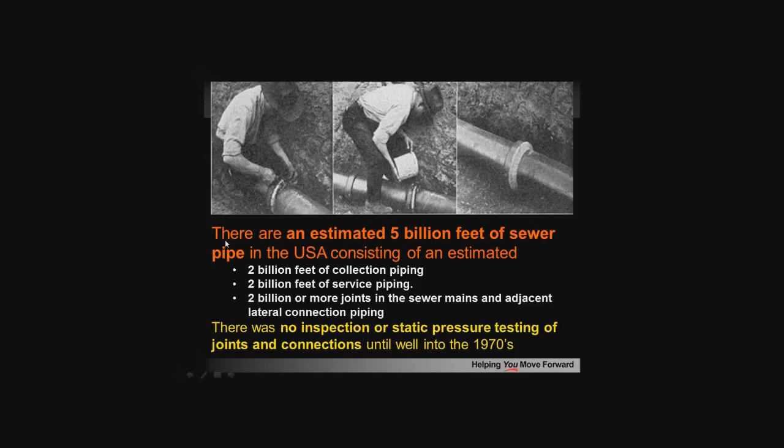The trench is basically what we see here with the bedding. This is only one trench. There's multiple trenches underground, and all these eventually meet somewhere, making it easier for any groundwater to travel within a man-made trench than the native soil.

Once again, technologies for sealing the joints as applied here could have been cement or tar. These trenches make it easier, once again, for any water coming either sideways, along it, or above it to follow these channels along our piping system.

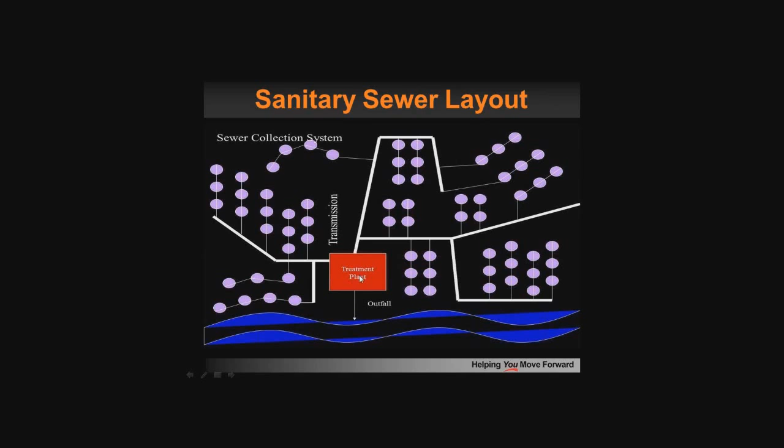Here's a little overview of our collection system. We have our manholes, our piping, our transmission lines, everything's for pump stations. They're being pumped to the treatment plant, treated, and back to the outfall.

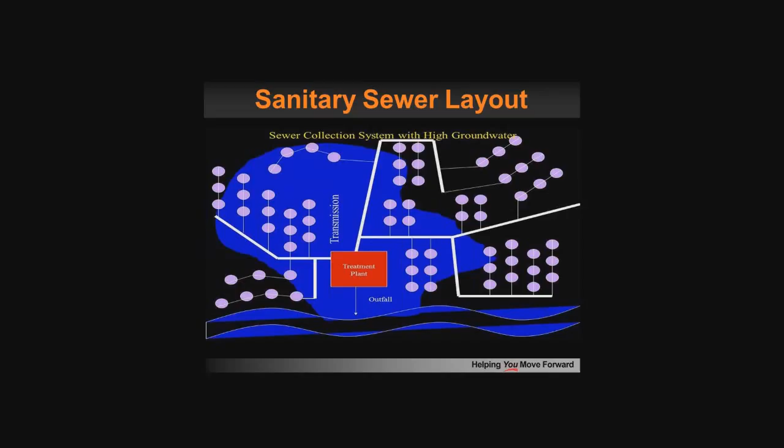Some of our systems are underwater. When I say underwater, I mean we have groundwater that's present on the low end of the system. If groundwater is there and it penetrates into the system, it can surcharge our system, creating all the negative effects of SSOs, or flowing back into the homes, basement floodings, etc. So we don't want that.

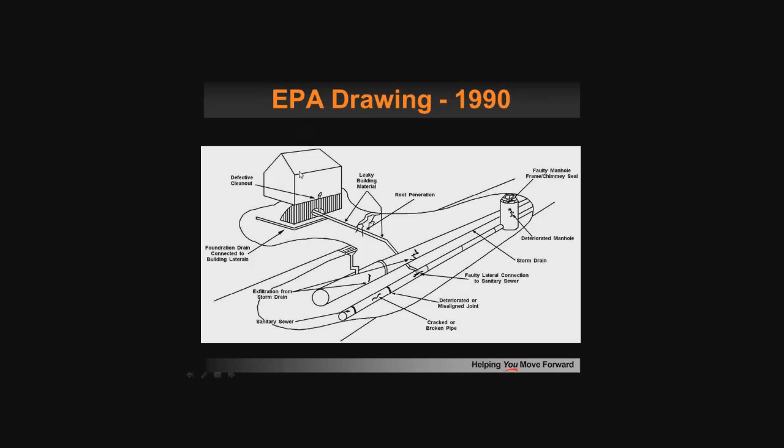Here's a famous EPA drawing from 1990. We've basically made it a little more visible for us to understand what's going on. So here's our storm trench, here's our sewer trench, and usually the storm trench is at a higher elevation in the ground than the sanitary.

We have our manholes that basically allow some water to come in. We have storm sewers that are not always airtight or watertight. Even when they're put in, there's more standard practices now requiring these to be air tested or even visually inspected for non-leaking after they've been installed.

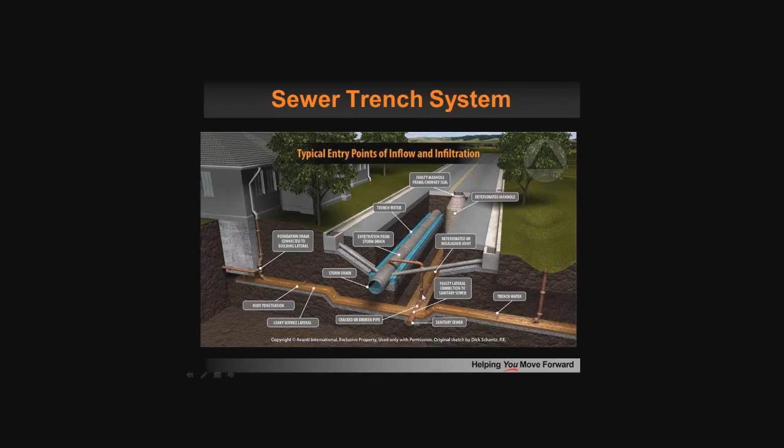We have our foundation drains here. We have inflow that may be coming in, maybe a sump pump. We've got problems with the sewers with root penetration, cracked or broken pipes, defective service connections, name it. All these are buried infrastructure, and at some point where there are joints, they will allow groundwater to come in.

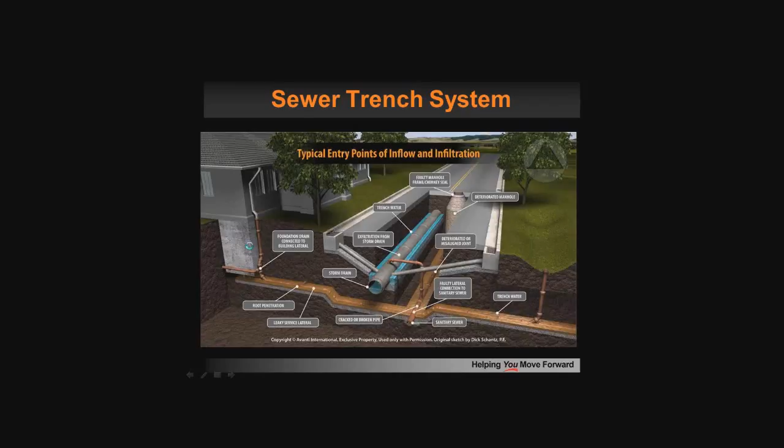Here's another side view. Basically, if we have a rain event, water will go along the trench of the storm sewer, eventually finding its way into the sanitary, overloading the system and creating issues. Issues we know of above ground, or when we see manhole covers where we have water coming out, not always a nice view.

Another picture of this: our catch basins, storm sewers. We have grates, everything's going towards the storm sewer, trying to get the water away from the house or homes into our piping systems. Our foundation drains, storm drains, sanitary sewers, all well embedded in man-made trenches.

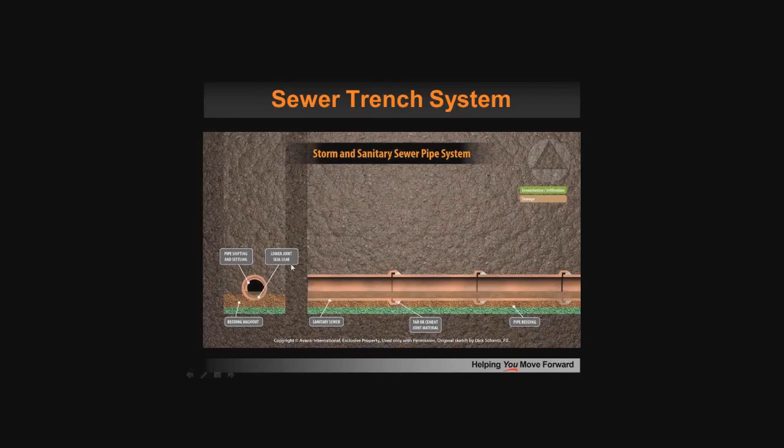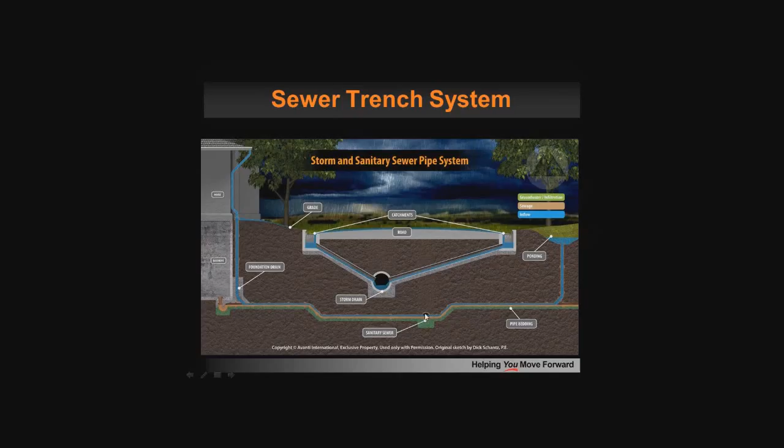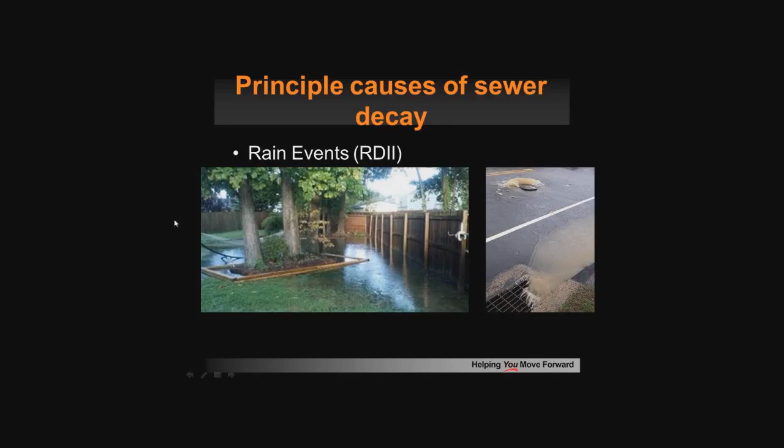Here's what looks above ground. How many times have we seen this? Here's a backyard, here's our storm sewer gulping everything down from the street, asphalt. Our sanitary sewers are overflowing. I'm not saying one leads to the other, but we can visually see consequences above ground and just imagine what's going on underground.

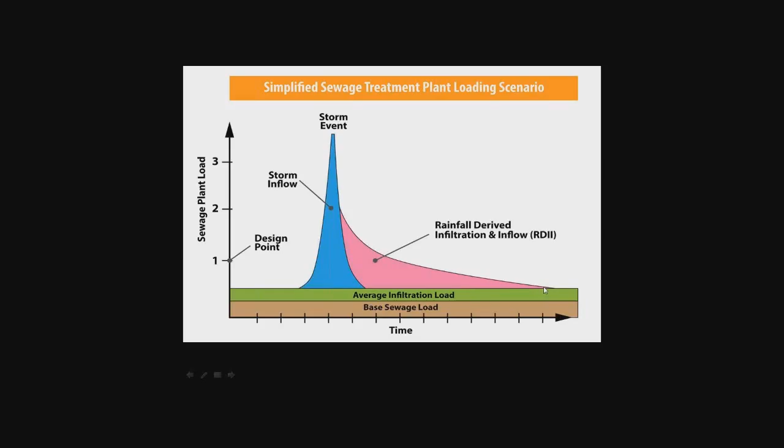Here's our famous graph. We have this storm event, the inflow along with groundwater. This is where we get to our peak, where groundwater eventually percolates into the ground. This is where we have a smoother line here, that rainfall or groundwater saturated soil finds its way into our collection system, and eventually the flows go back down to what they were before the rain event.

So we surcharge our systems after rain events when we have infiltration coming into these pipes. You see here exfiltration. Why is there exfiltration here? Well, all this storm sewer into the trench will find its way into the sanitary trench, overload it. Then we get exfiltration where we have sewer water going out into the soil.

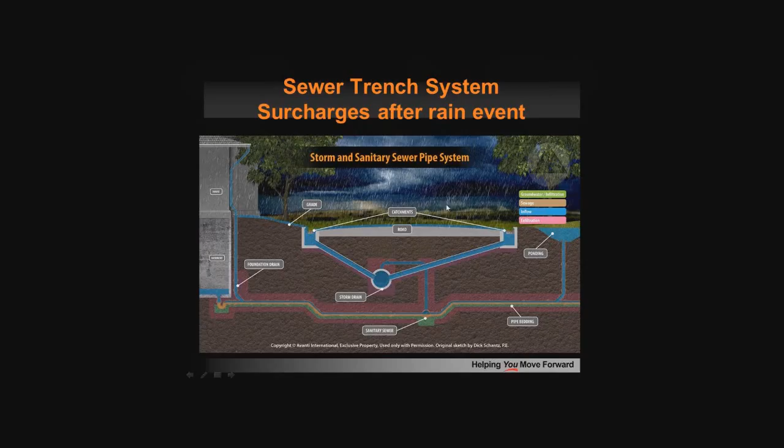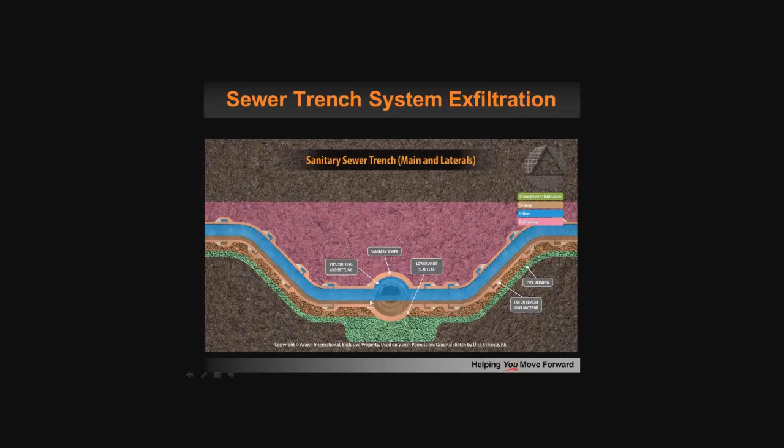As that rain event eventually stops, you may get infiltration. What we're seeing here is still the exfiltration, where our sewer system is overloaded. But as time goes by, what happens? Well, now we have infiltration. What this is, movement of water coming into the system, coming out due to our bedding.

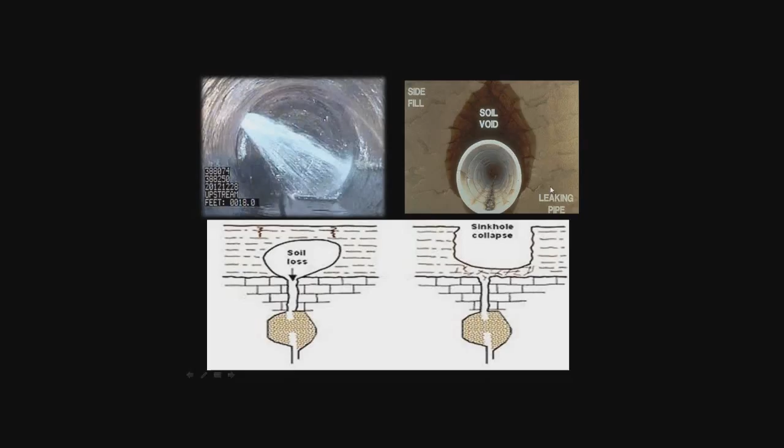We may have fines that also come in. We're washing out around the joints, around the connections, creating areas of no more backfill or very loose backfill. So now that our system is going back down normally, that groundwater that's saturated the soil is now coming in. Originally we had an overload going out. Now we have groundwater coming in, and that's on a long curve that we saw after that high rain event.

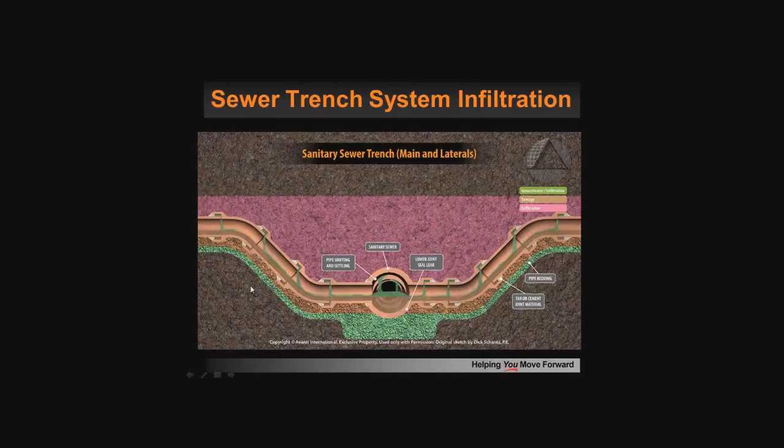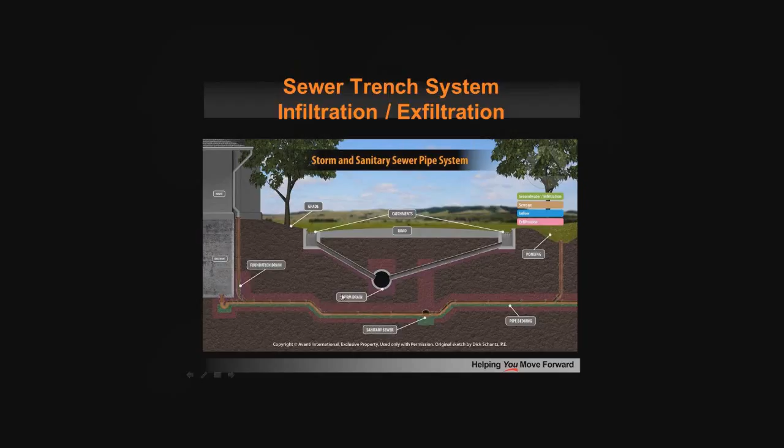So this is going on, saturated soils, our catchments, everything here. We have our exfiltration, infiltration, movement of water in and out of the joints, eventually this is what we're seeing, the cutout. What used to be supported may not be supported as well anymore, as the fines may have washed into our sewer system. If you're down in Florida, sometimes you'll see there's as much sand coming in as water. Same thing can happen.

And if left unattended, all these millions of dollars that we've put into the ground without maintaining or trying to sustain these systems, we can get failures in the long run. Failures may be due to not preventing that water from coming in. I can talk to you about failures here - I've personally witnessed this. But it's our responsibility to maintain and sustain these investments.

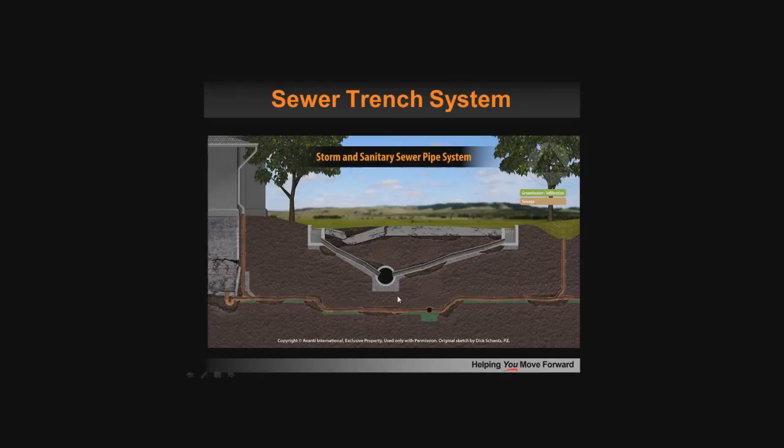A few examples of what we can see. Here's a manhole allowing groundwater to come in. This is probably extreme, but it is out there. All you've got to do is, excuse the expression, pop up a few manhole covers and have a look after a rain event.

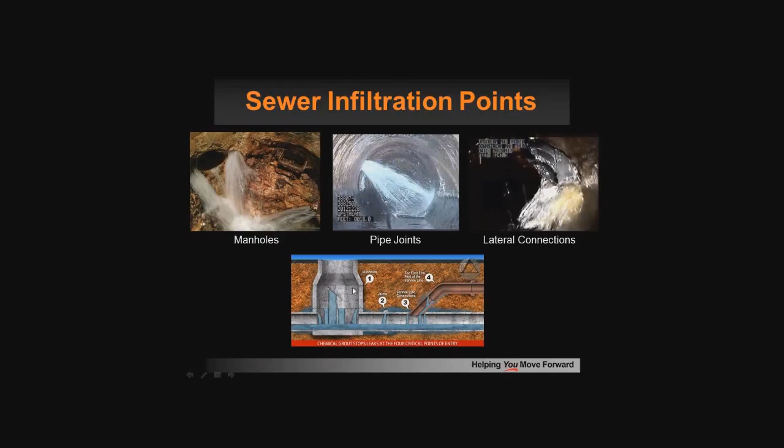Infiltration at the joint, same thing, and at service connections. So all the points of entry into our collection systems that we can come out and fix using chemical grouts when it's not structural issues.

This is a very nice drawing. This is our piping system, no problems. We have a joint that allows groundwater to come in, or groundwater or sewage water to go out when we're in surcharge. And basically all of the fines come in, around or adjacent to the joint.

Right now we're getting into a structural problem at stage 3. Well, chemical grouts are not structural. They are designed to go out into the soil and seal the soil adjacent to these. So it can be used at stage 1 or stage 2.

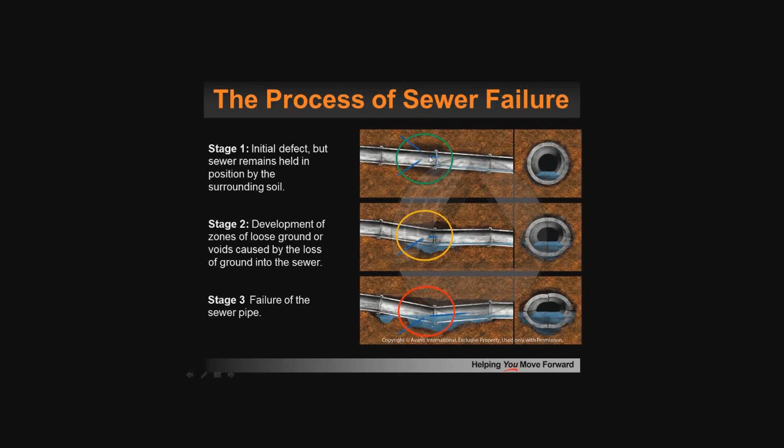Multiple technologies out there: dig and replace, fold and form, sectional lining, pipe bursting, cured in place, and chemical grouting. You've got structural repairs here, and you have chemical grouting, which is the only technology that's designed to stop groundwater from the inside and sealing the soil around the issues. So how can you get the most return on your investment?

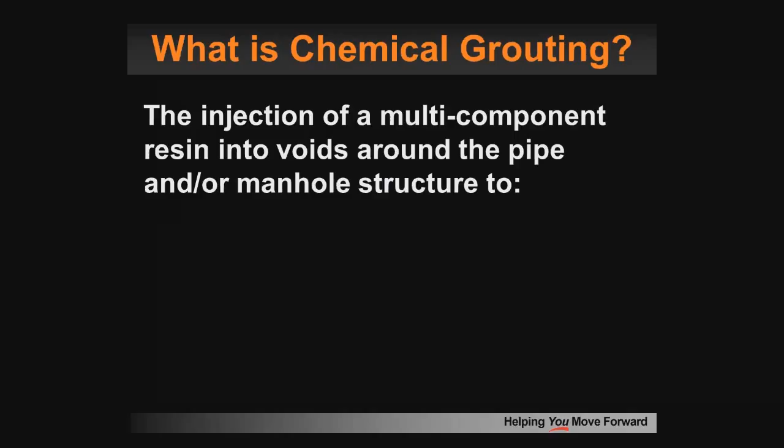First, let's define what is a chemical grout. It's the injection of a multi-component resin into voids around the pipe and or structure. It doesn't matter what the structure is - it could be a wet well, a lift station, or a manhole. But the goal is to stop infiltration, exfiltration, stabilize the surrounding soil, stabilize the pipe, and seal the annulus between the host pipe and the liner.

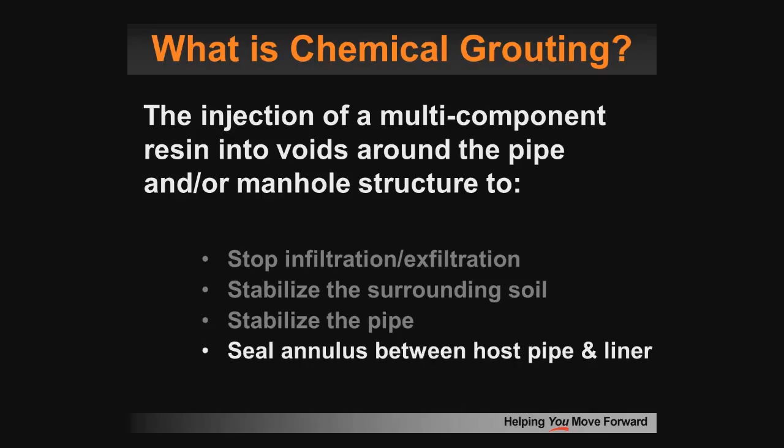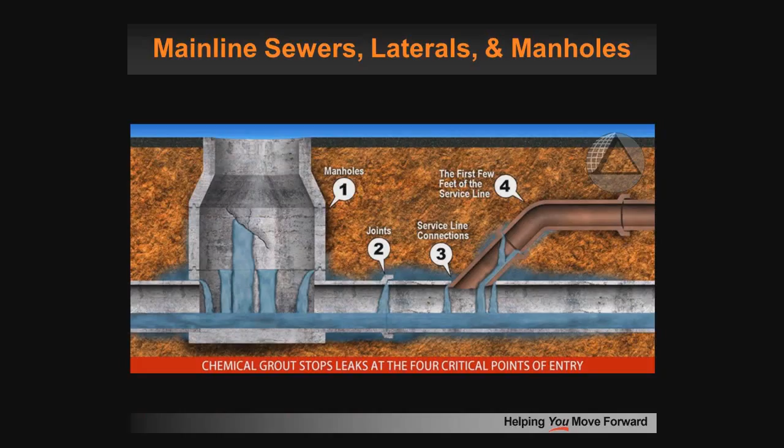They started using chemical grouts in municipal applications in the 1960s, so we consider it a permanent solution.

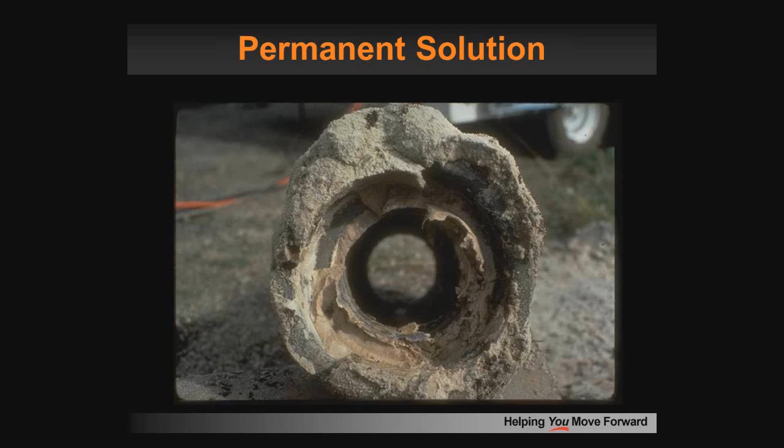This is what they call the grout donut. This was from an 8-inch pipe they dug up some 25 years after it had been grouted. And this donut is what stops the exfiltration and the infiltration.

We consider it permanent because the U.S. Department of Energy did testing on 7 different types of grouts over a 20-year period, and they gave acrylamide a 362-year half-life in the soil. They ultimately used it to encapsulate radioactive waste, but they really wanted a long-term solution to stop the groundwater from leaching that waste into local streams.

There was a question that was sent in prior to the webinar from Mike Cardwell in Westland, Oregon. Mike, thanks for the question. It addressed wet-dry cycling and also infiltration at laterals.

Regarding wet-dry cycling, it can go through wet-dry cycles. If you have a cup of cured grout on your desk, it will start to shrink, and when you add water to it, it'll come back out. It'll do that over and over again. If you allowed it to totally dry out, then it wouldn't come back, but as long as there's some humidity or some moisture in the soil, it'll keep the grout happy.

And there is groundwater outside the pipe - that's why you're grouting in the first place - and then there's sewage inside the pipe. So between both of those, they'll keep the grout happy.

We sell the same product that's used in municipal markets here. We sell into Egypt, where it's a very arid climate, arid soils, and there's enough moisture in the soil to keep the grout from shrinking and shriveling up. And there they're using it to stop water coming into large tunnels.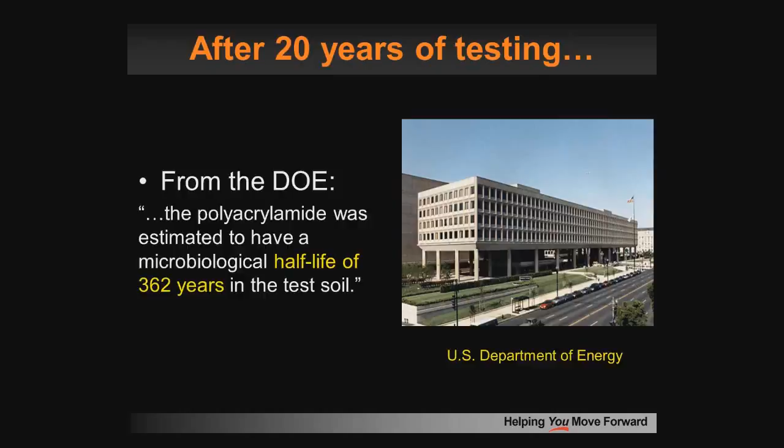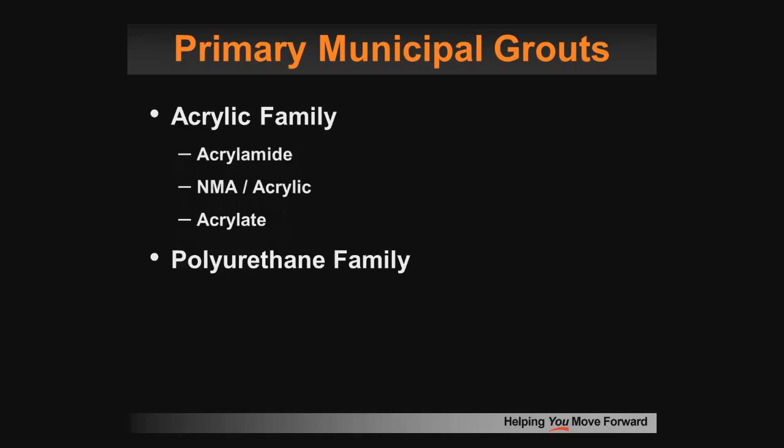Primary municipal grouts include acrylics and polyurethanes, and the acrylic family breaks down into acrylamide grout, NMA or acrylic, and acrylate grouts. The main difference between those is the amount of acrylamide in each one.

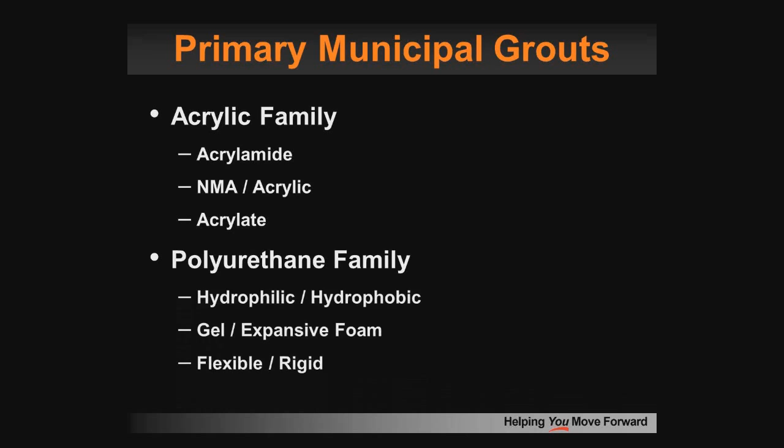The urethane family breaks into hydrophilics or hydrophobics, which really addresses whether or not it can go through wet-dry cycles. It can be a gel or an expansive foam, and it can cure flexibly or rigidly.

The reason acrylics are primarily used in municipal grouting is they're the thinnest products on the market. If you have a cup of acrylamide grout sitting next to a cup of water, you cannot tell the difference. Water is 1 centipoise, acrylamide grout is about 1.2 or 1.5 - you really can't tell. There's no suspended solid, so whereas cement can only go as far into the soil as the particle size will allow it, there are no suspended particles in acrylic grout, so they can go anywhere water goes.

Field adjustable cure times - the contractor or the municipality can change the cure time anywhere from 5 seconds up to 14 hours in the field. They can adjust the gel strength when they have high levels of infiltration. They can use soap and water for cleanup. The grouts are not activated by moisture - that's helpful. There's no need for solvents, and there's a successful track record.

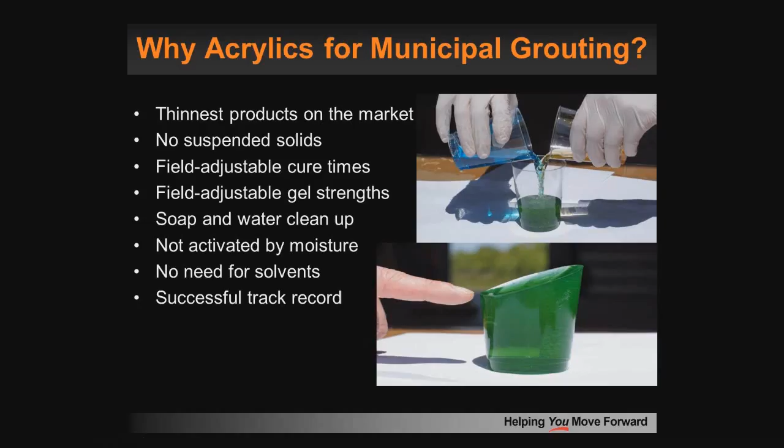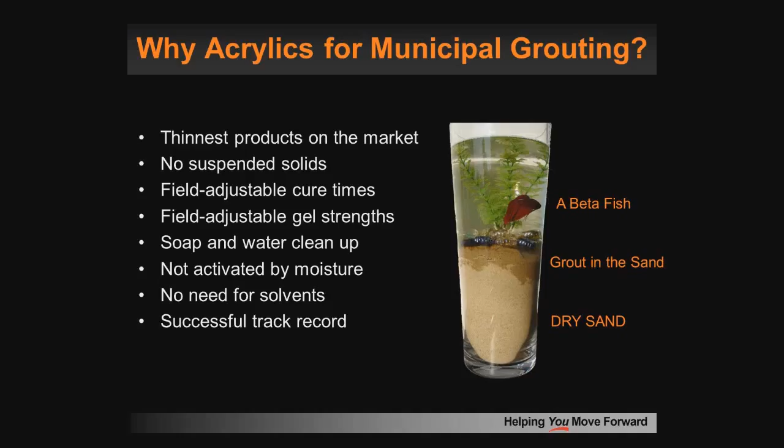For example, caffeine and aspirin are more toxic than the acrylamide in chemical grout. So all that is to say it's less toxic than things we use every day. It's important to keep it in context. And with that, I'll pass it on to Ron.

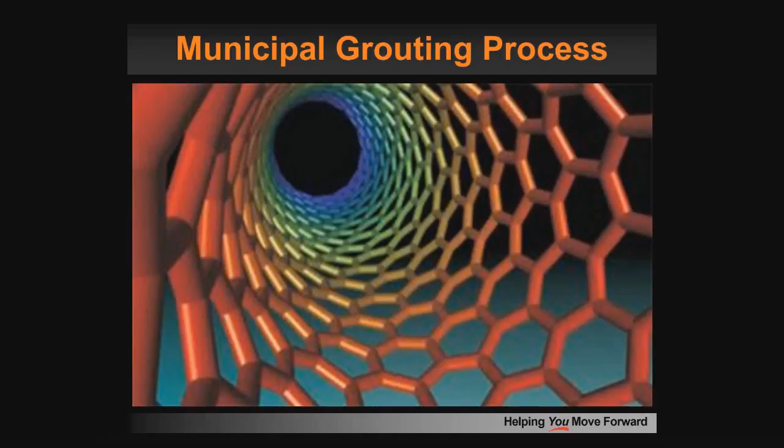Well, I would also like to thank everybody for attending this grout webinar. I'm going to discuss the processes about grout, and these processes, when done correctly, will yield predictable outcomes.

These processes include cleaning, inspection, assessment, prioritization, and rehabilitation of the systems. With sewer cleaning, basically a vacuum truck positions itself over a manhole and with a jet nozzle moves the debris and fine sands to the manhole, where the materials are vacuumed out of the system.

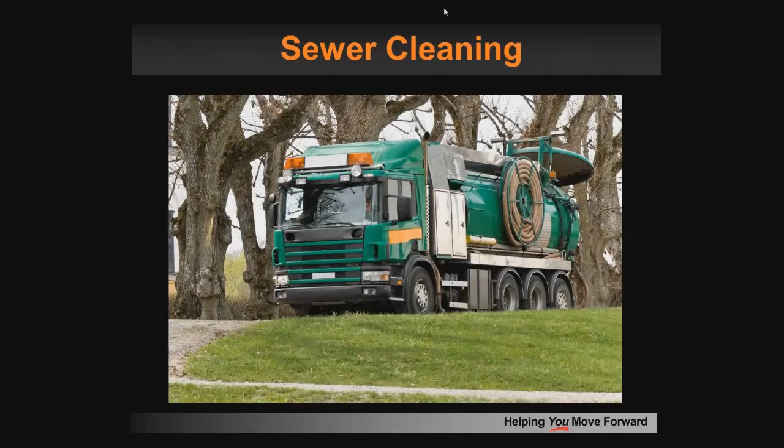Now, the inspection process uses a CCTV camera mounted on a robotic crawler, controlled remotely by an operator. The crawler travels through the pipeline, and the operator documents the observations or defect codes according to the PACP codes. In the assessment process, the coded observations or defects help determine if the line segment has infiltration or structural issues.

The collected data will be used to set priorities within the collection system for rehabilitation.

If it's a structural repair requiring pipe replacement, pipe bursting, or even a lining project may be needed for the rehab work. In a non-structural repair, chemical grout is a process by which a joint or connection is tested and sealed by a packer.

That pressure injects chemical grout through a pathway into the surrounding soil, and an air test is performed to validate the repair. Now, in the grouting process, it involves three steps: test, seal, and validate.

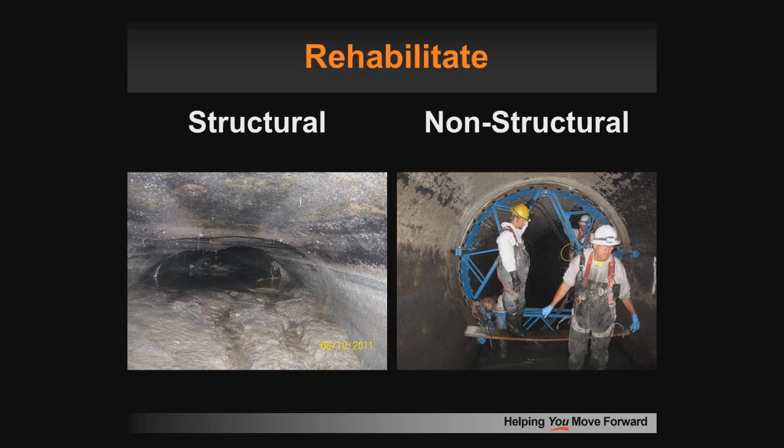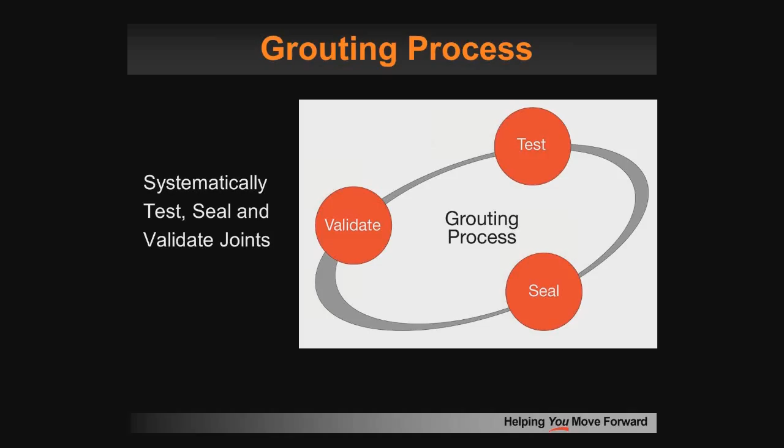In the testing portion, the operator will pull a packer and a camera through the line segment, pressure testing every joint. A pressure transducer mounted to the packer can measure the void pressures and electrically transmit the reading back to a digital readout on the control panel, where the operator can see that the joint passes or fails an air test.

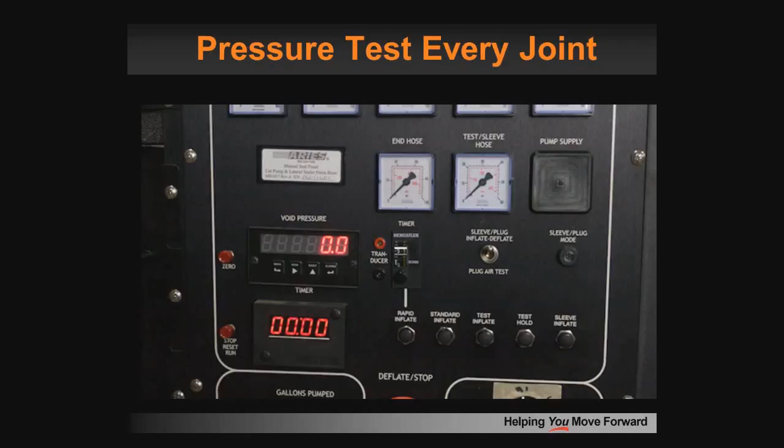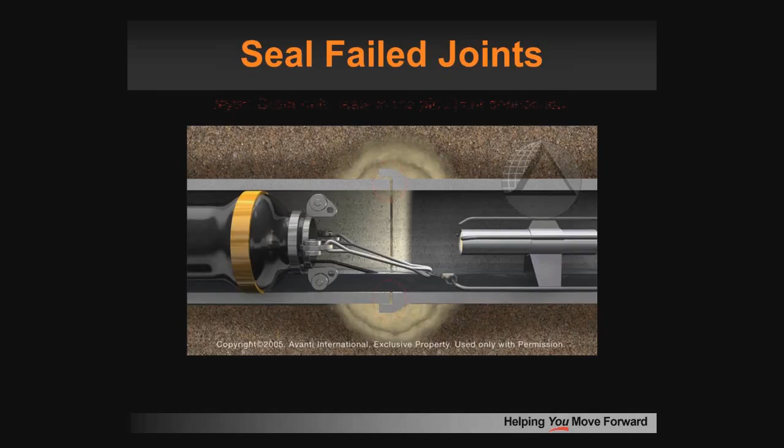In the sealing process, all of the failing joints are pressure injected with chemical grout to refusal. We use the pathway in the failed joint to inject chemical grout into the soil, whereby we make a soil-grout substrate that will stop infiltration of groundwater.

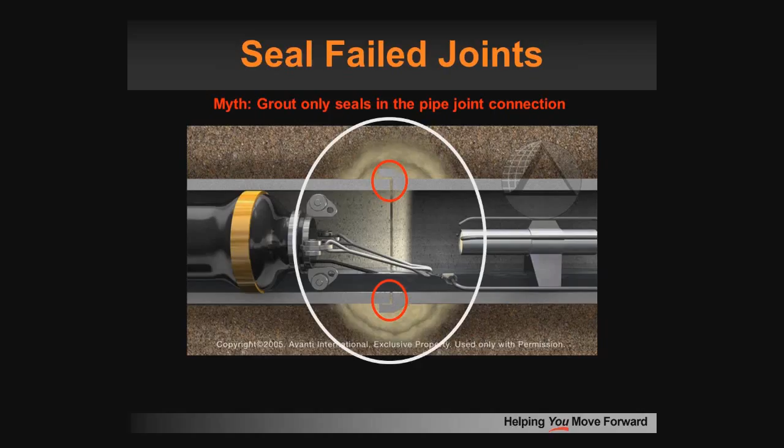We then validate that the joint repair was done by conducting a retest of the chemically sealed joint with another air test, and confirm that the joint passes the test. These three steps ensure that a grouting project is done properly and according to the ASTM specifications.

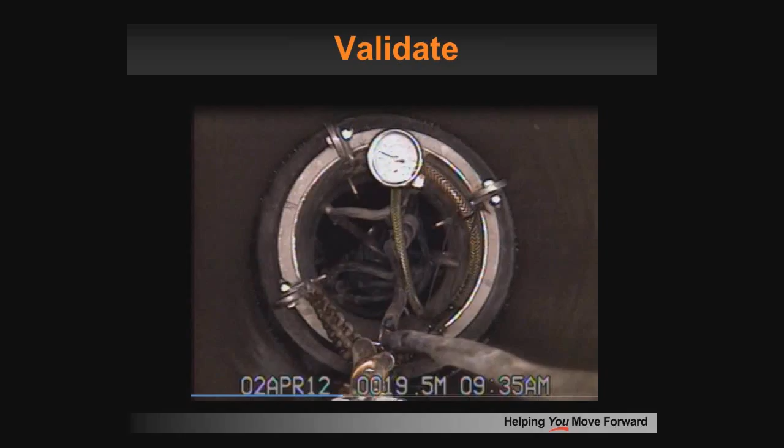Record keeping: this information is necessary for us to record for future review and to evaluate that the grouting processes were followed. Here we have two documents, the grout mix data sheet and the sewer test seal work data sheet.

On the first document, the data collected includes information on the contract, the municipality, and the work to be performed. It also includes information on the sewer pipe, like pipe diameter, materials, and the lateral pipe information.

Here we have the test and seal packer information. Information is collected on the type of packer being used, mainline or lateral, and the size of the packer and the void volume, the effective sealing length of the lateral bladder.

A little further down is the grout sealing chemical mix. There is information on tank size, the batch size that is mixed, the percent solids, and the gel time of the mix. This information is necessary to confirm that the chemicals were mixed according to the manufacturer specifications.

On the second page is a sewer test, seal, and data worksheet. The information collected here is for the specific line being worked on. It has all the information: who's performing the repair, the location of the basin, and the project taking place, basically the city and street name, upstream manhole and downstream numbers.

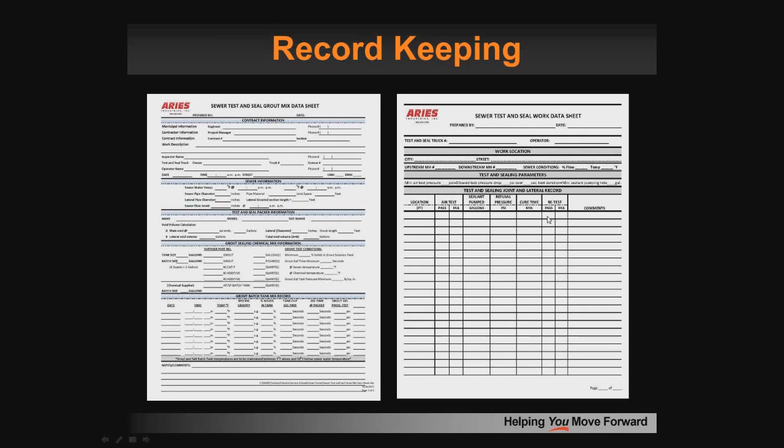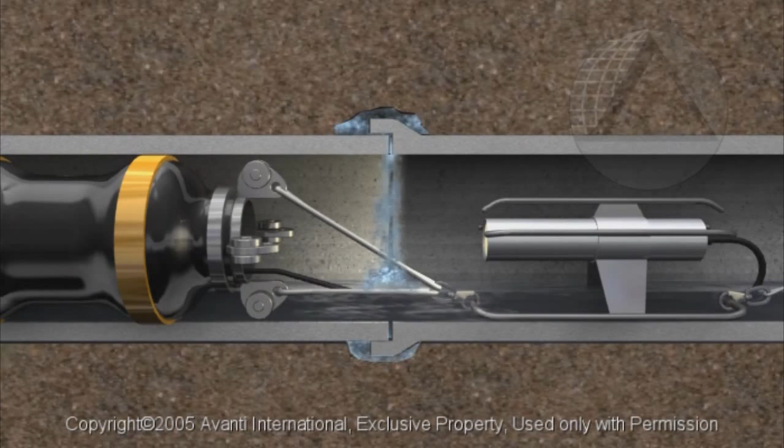On our first animation, here we see groundwater entering the sewer system through a joint. The camera and packer are positioned over the joint, and an air test is performed. Upon failure of the air test, chemical grout is injected under pressure through the pathway into the surrounding soil to stop the infiltration and to stabilize the area adjacent to the joint. A second air test is performed to confirm that the repair had been made, and then the process was repeated on the next joint.

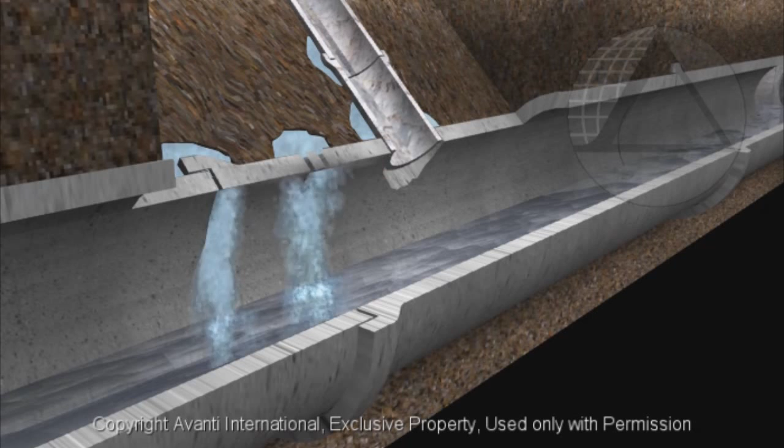On animation 2, here we see a main line with infiltration and a lateral connection. A liner is installed for a structural repair.

Hey Ron, now we have to reinstate. Can I ask you to hold for a second? Let the PowerPoint catch up to you real quick. Okay, where are we at on it? We're now doing the sealed lateral. Go ahead.

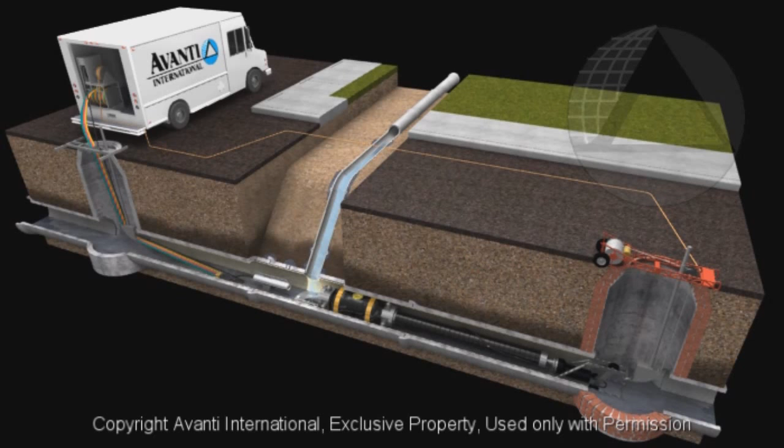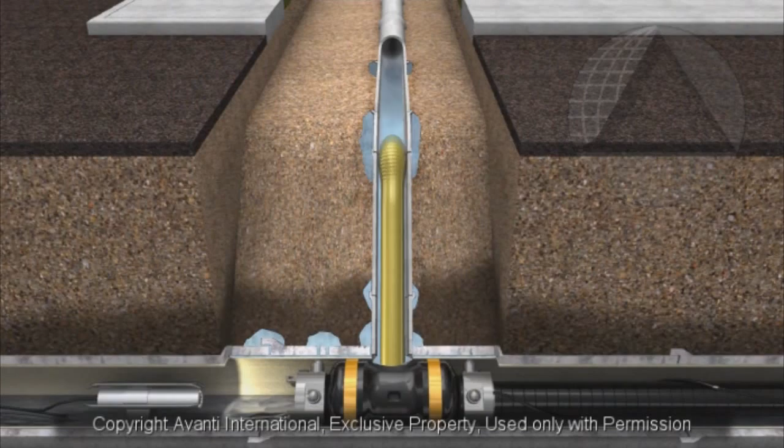We have the main line with infiltration and a lateral connection. A liner is installed for a structural repair, and then the packer is rotated into position. A lateral bladder is inflated, and an air test is performed. Once it has failed, chemical grout is injected up the lateral connection through the annulus and out the defects in the pipe. A second air test is performed to confirm that the process was done properly. The lateral bladder is vacuumed back into the packer, and then the operator will continue on to the next connection.

Yep, if you'll hold that there for a moment. I want to ask a question from the audience, and I think I'd like to direct this to Daniel, and I know you'll have a crisp answer for this, Daniel. Why not use urethanes in main lines and laterals, versus acrylamides, or the acrylics? Yeah, great question.

Urethanes are more often used in cracks as expansive foams or void fill, but in the main lines, urethanes are moisture activated. That means you run the higher risk of grouting up your hoses. Since acrylics are not moisture activated, urethanes could grout up your hoses. Also when they cure, they're very sticky, and they slowly get thicker and thicker, whereas acrylics stay water-like and then all of a sudden turn into a solid, so they can penetrate farther. It would also be much more expensive to grout main lines and laterals with urethanes - well, it might be somewhat more expensive, but I think it mainly comes down to the sticky.

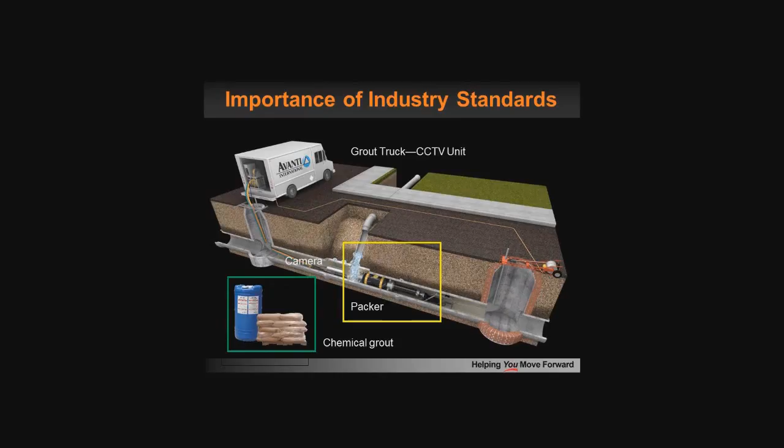Perfect, all right, well if you move to the next slide please. Yes, okay sir. The importance of industry standards. Well, there's multiple pieces of equipment and techniques here that come into one situation, basically to stop that groundwater from coming in. So there are test and seal packers. Mark, do me a favor and press that button to show my screen.

TV and grouting unit. The first thing we want to make sure is that the chemicals are going to perform as we want them to, as needed. So it's important to have chemicals that are not biodegradable, that will react in the presence of active running water, and that will perform in these cases. So there are standards on the chemicals being used.

On the delivery equipment, if we're looking at the CCTV grout truck, we have to make sure we can pump these chemicals out at a certain gallons per minute, depending on what we're doing. We need the monitoring system for the void pressure, whether it be air testing or chemical pumping in the void, to give us information in the truck. What are these pressures? How many gallons am I pumping out? All this, including compressors, must be unified to give you the performance that's required.

The same goes with the packers. You have mainline packers. The operators working with these packers need to know the voids between that packer and the wall. Why? Because that gives you information on how long it takes to fill the void, so you can work with your gel time and get the materials on the outside of the pipe in a reasonable amount of time. All these are very important.

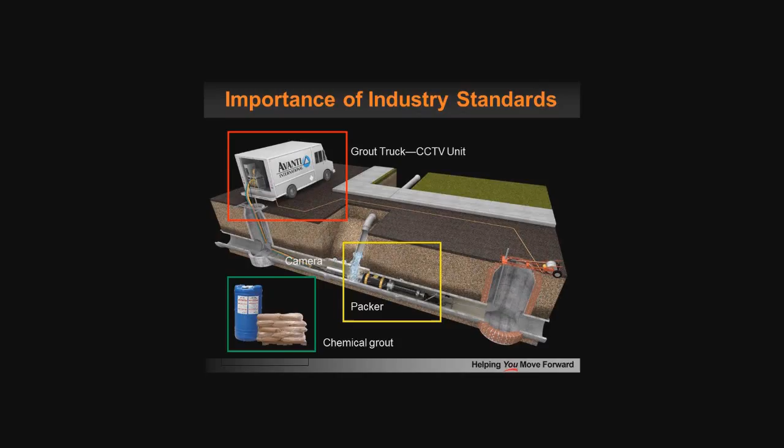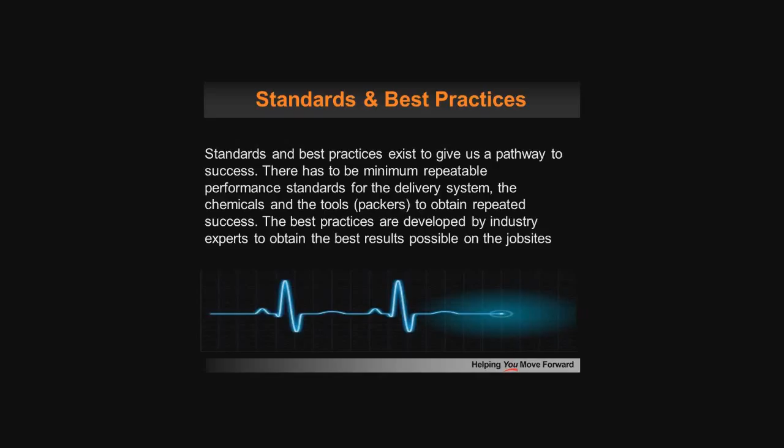So they must be unified. There are standards. Why? Best practices exist to give us a pathway to success. If it's not something that needs to be repeated, then it's not a standard. A standard is something basic that we need to follow. Sure, sometimes we can deviate slightly according to field conditions, but there has to be a minimum repeatable performance from all these components, the delivery system, the chemicals, the tools or packers, to obtain success.

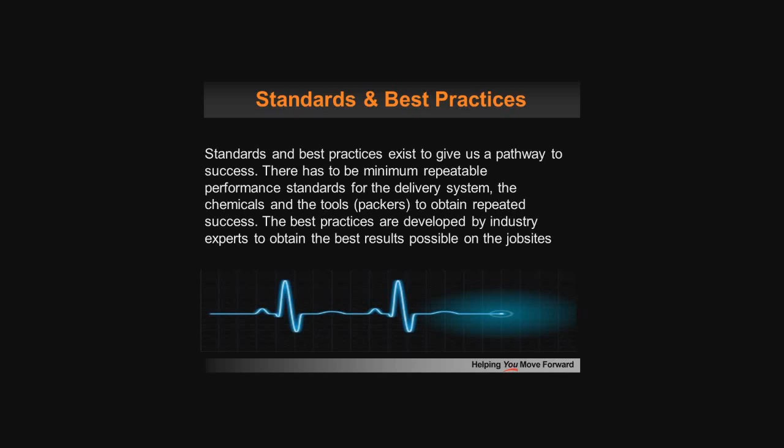So best practices are developed by industry experts to obtain the best results possible on job sites, not in the office.

Standards for chemical grouting: back in the early 2000s, many of us got together, manufacturers, contractors, engineers, municipalities, and interested parties around ASTM, and came up with the first one, which was actually mainline sealing, standard practice for rehabilitation of sewers using chemical grouting. This is a long process, a thought-through process. These ASTM standards are being revised on a 5-year basis. It actually took us 2 years to get the first standards out for us to agree on basic standard practices.

Main lines, laterals, and manholes were basically the standards developed through ASTM. As of last year, NASSCO, the National Association of Sewer Service Companies, has a division called ICGA, the Infiltration Control Grouting Association. A group of people got together and decided we need to make something more usable by engineers and municipalities, a standard specification they can use either for themselves or for bid work, to determine what needs to be verified or not.

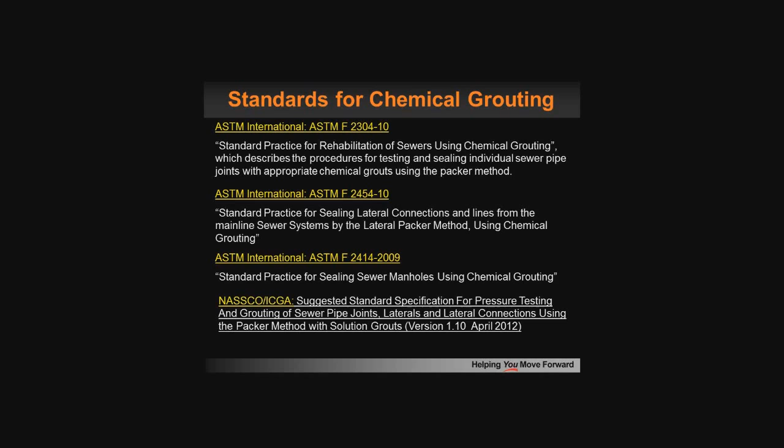What do we need to verify? We will be sending that to everybody as a result of their attendance here. So you'll get a copy of this afterwards. Very important, I encourage you to read through it.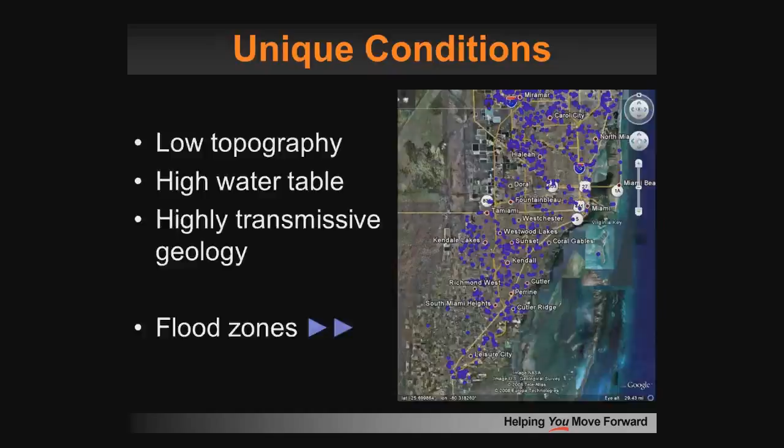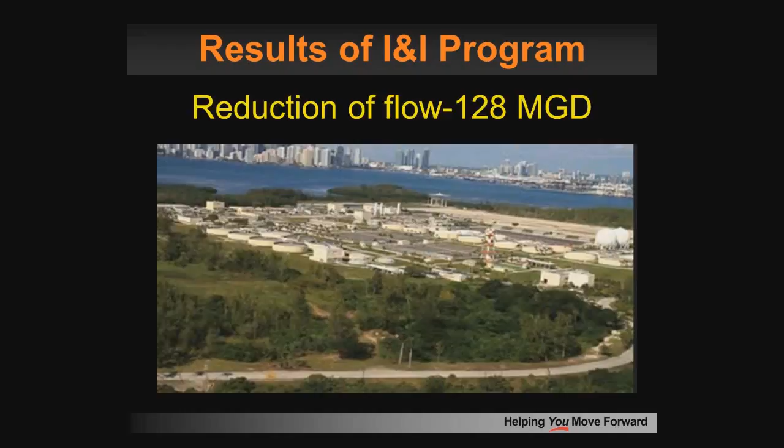They started a grouting program, or an I&I program, about 25 years ago now, and they've reduced their flow 128 million gallons per day, which to me is amazing. And certainly that's not all due to grouting. Grouting is one tool in their toolbox as part of their I&I reduction program. But they will tell you that it's the best bang for the buck. For every dollar they spend on grouting, they have a $2.50 cost avoidance savings. And so it's a tool that they use when there's not a structural problem and they're just focusing on stopping infiltration.

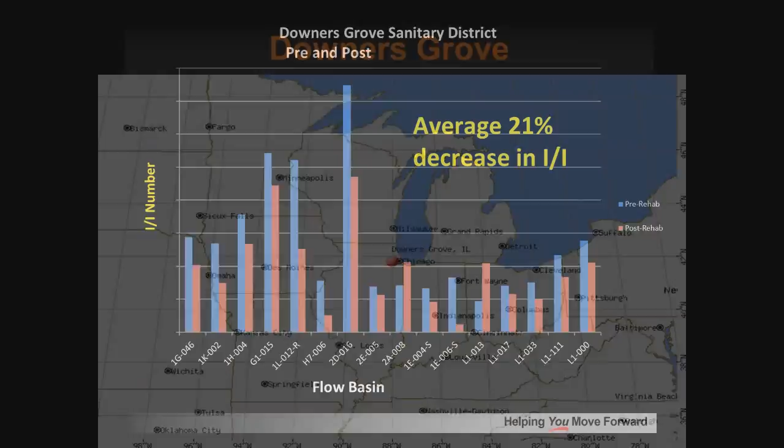Downers Grove, there was a webinar on Downers Grove just a couple of weeks ago in Illinois. After grouting, they saw a decrease of 21% in their infiltration. And what's more significant is that they were going to spend $30 million on collection system upgrades and new treatment capacity, but instead they spent $3 million on some maintenance operations to stop the infiltration. So they saved $27 million with their cost avoidance with their grouting program.

And then finally, this is a case history for the city of Sunrise in Florida. And there's a lot of text on here, but if you look at the graphics to the left, you can tell that what they're doing is grouting a mainline joint. And what they had here, they had 720,000 gallons a day of flow. It was a 500-foot section of pipe. The joints were every 5 feet. And the failure rate of the joints was 100%. So every single joint failed an air test. And they used 7 gallons of grout per joint at a cost of about $6 per gallon. So they invested about $4 grand for their chemical grout.

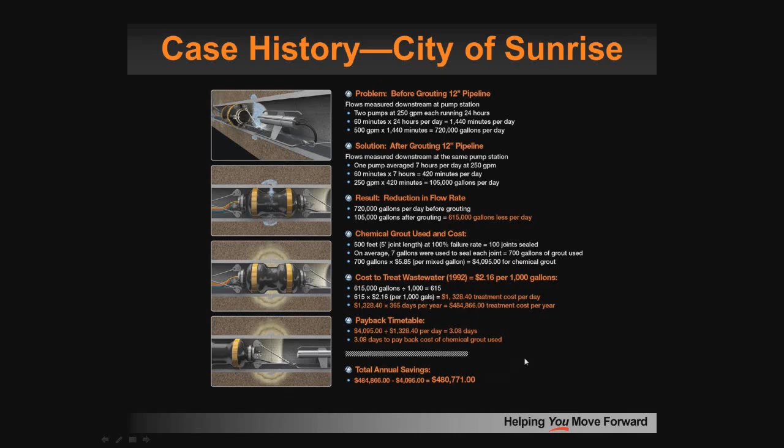Now at the time they were spending $2.16 per 1,000 gallons to treat that groundwater. So if you take the cost of the grout or the investment in their grout and divide it by what they were spending every day to treat the groundwater, they made their money back in 3.08 days, and the city saved $480,000 just that year.

65%. I'm going to go ahead and close this poll, and I'll share the response, and it may not surprise you. All the above took the prize. And to set up a discussion here that I think is pretty interesting, I'd like to make Ron the presenter.

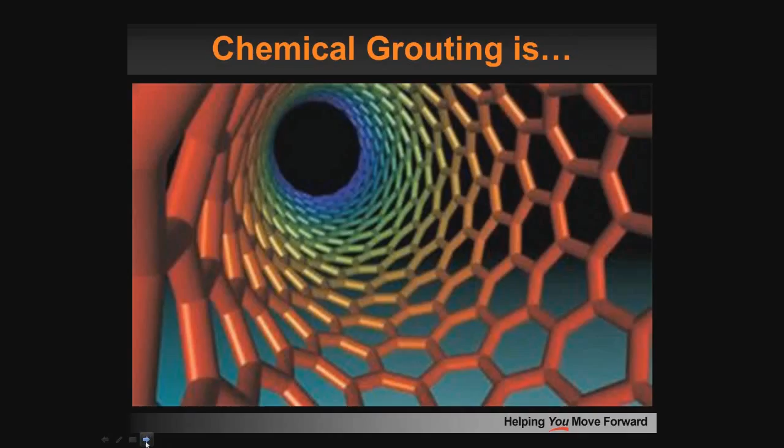Now here's a question. Is chemical grouting a maintenance operation or an engineering project? I'm going to bring a couple of points up on the engineering area. Chemical grouting can be used in a structural trenchless technology rehab project. Grout is used to control the unwanted water that could jeopardize the successful installation of a trenchless technology.

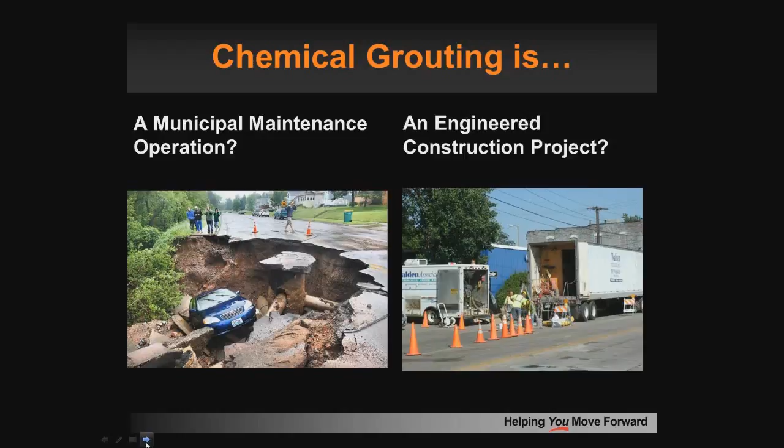Also, grout is the most cost-effective method to eliminate infiltration of groundwater and the fine sands and stabilize a structurally sound pipe. In a manhole rehabilitation project, pressure injecting grout behind a manhole structure is used again to control the water from entering the manhole structure before a new coating or even a lining is installed.

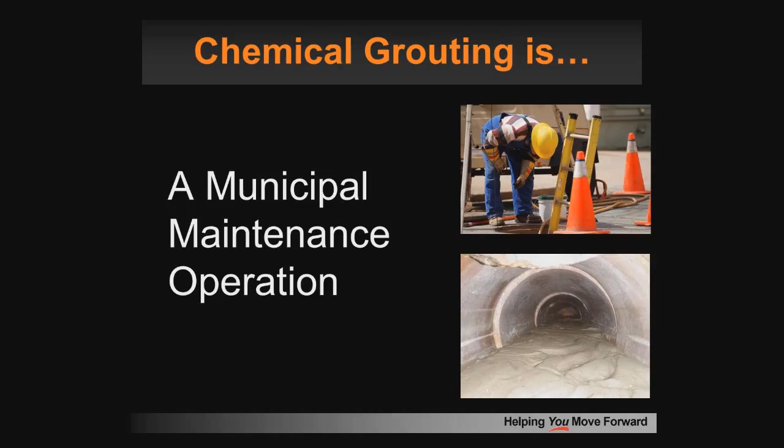Is chemical grouting an engineered construction project? We need to look at chemical grout as an engineered construction project, and we need to look at the entire basin. We want to see repeatable, predictable performance in order to obtain quantifiable results using the process of chemical grouting.

When we grout the manhole structures, test and seal each joint and lateral connection within a collection system or basin, we can measure the results by looking at the data collected from our pump stations, flow meters, and the treatment plant. We can see a reduction in operational hours at our stations, a measurable reduction of flow past our meters, and a decrease in gallons of water entering the treatment plant.

If we are following a systematic approach to chemical grouting, we can demonstrate that chemical grouting is both a municipal maintenance operation and an engineering construction project. Our investment using chemical grout with a systematic approach will return measurable savings in dollars within our collection system and treatment process.

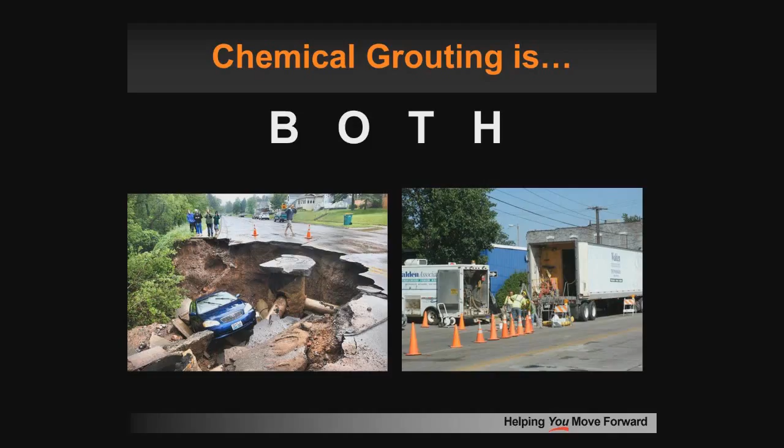There was a reference made to PACP codes. I think, Mark, you may have referenced that, PACP codes. Could you respond to a question from one of our attendees? Explain what a PACP code is, please.

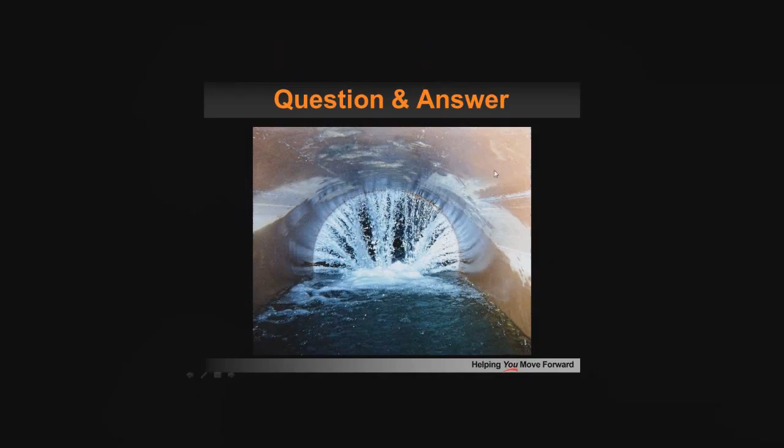PACP is a uniform coding dictionary used to code what you're seeing while doing TV work down in the pipes. Within PACP, there are grout codes used while chemical grouting is being performed. PACP belongs to NASSCO, the National Association of Sewer Service Companies, and it's a widely accepted, nationally recognized coding system for defects.

And Mark, while you're on a roll, what type of pipes can be sealed with chemical grout? Basically any structurally sound pipe, whether it be storm or sanitary, anything that's not brick. By pipes, I mean we usually need to send remote equipment like packers.

Thanks, Mark. And Ron, if you'll respond to this one real quick: how are the chemicals pumped? Basically, we have two tanks in the truck at 30 gallons each, so we have a mix of 60 gallons for one batch. The chemicals are drawn out through a pumping system at a 1-to-1 ratio, then pumped down through the hoses into a packer. At the packer point is where the two chemicals, parts A and B, mix together in the void, and then pressure forces or injects the chemical through the pathways into the surrounding soil.